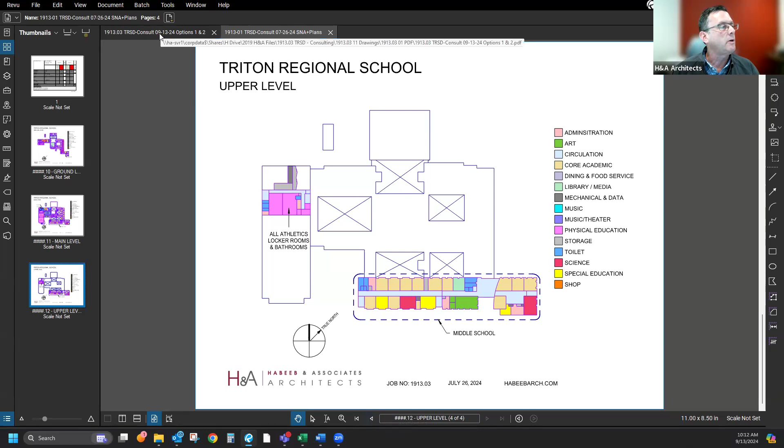You might remember the space needs assessment we talked about at our last meeting, where we identified the use of each and every space in the facility, and then did a review on how those spaces compared with the MSBA standards. The overall conclusion was that there was excess capacity in the school based on those guidelines, and we also found that some spaces were oversized—the library in particular comes to mind, which was grossly oversized by the MSBA's standard for a high school.

So thinking about those things and the comments we heard last week, we've come up with some ideas about how we could potentially rearrange things and also address entry.

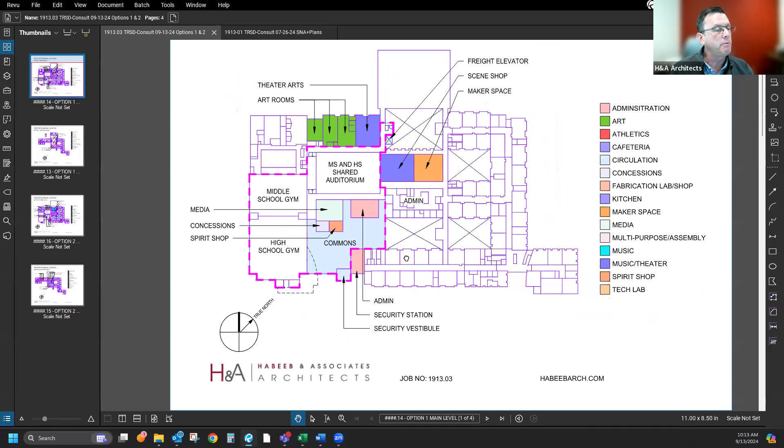So the courtyard, you might recall, is in this area here. The middle school is down here. And our main entrance to the school is tucked around the corner somewhere in this area. The building really does not present itself well to the road for pickup and drop off, and for entry in general.

So we started to think about how we could address that—how could we provide a secure entrance, and how could we rearrange things so that members of the public visiting this facility, other than the students, could get access to certain spaces for events that might occur after hours? If there's something in the auditorium, an athletic event in the gymnasium, perhaps an art show, a music performance, or a theatrical performance—how could we limit access to those elements the public needs to see while providing a secure boundary for the remainder of the school?

So there's a line here that comes around like this, suggesting what that boundary might be. In this option, the courtyard area could potentially be captured as indoor space, which would require some new construction to put a roof over that area. But it could provide a very generous area for entry, and also an area for informal events and socialization—I could imagine loose tables and chairs, and maybe even some limited food service in this area.

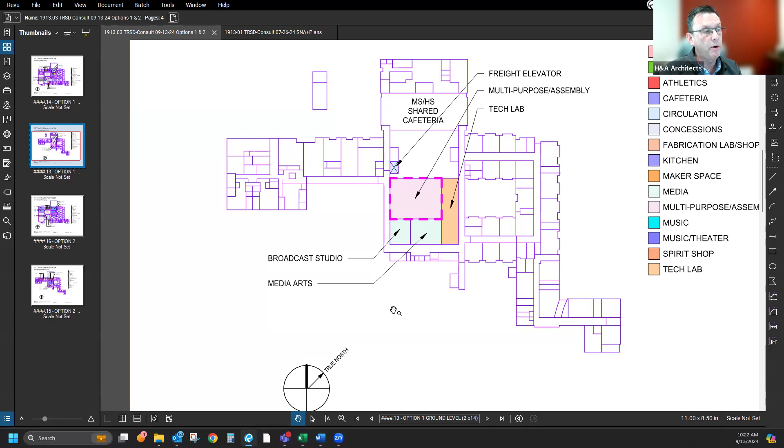And then there was some thought here about potentially a media arts program, the journalism, and a broadcast studio potentially for production of video and audio segments where recording could take place. And then here, suggestion was to consider putting a technology lab down here.

So that would— Can I ask a question? Yeah. So you have it as multi-purpose assembly. Mhm. So as far as the layout, and I'm sorry if I missed this, as far as furniture and fit and finish, is it largely an open space?

So, yeah. I'm thinking like at the high school, sometimes on the worst of days, when there's lots of teachers absent, oftentimes the library space is used for study when we don't have enough subs to cover. It's not ideal, but it's a reality we have to deal with. And could that be a space that could be used for that as well?

Is it that versatile? Is that what you envision? Yeah, I think the intent would be that it's very flexible, and could be reconfigured as needed depending on what types of events. It could be used for a study hall, or for an assembly or a small performance, maybe even a music recital, something like that.

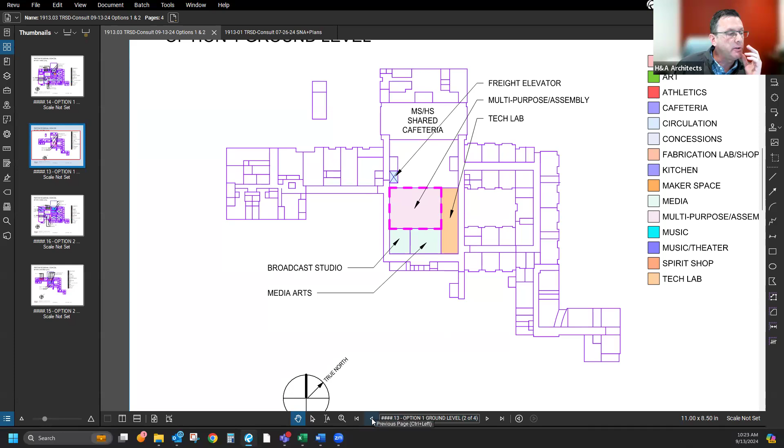One thing I do want to point out, which I neglected to mention, is the shop space is on the middle level or the main level of the school. But the loading areas are downstairs, down in this area here. So that creates a challenge for getting material to the shop, because we're talking about potentially a large set piece, building materials, whatever might be needed to supply the shop. We need a way to get that material there, and there's no immediate way to do that.

So we would suggest that a freight elevator could potentially be added right here, which is just a short distance down the corridor from the loading areas, which are in the back near the cafeteria. And that would have pretty quick access to the scene shop - it would be right across from the scene shop area.

All right, okay, so those are some big ideas. These are high level ideas. And there's another option that I can go through, maybe which I'll pause and see if there are questions on this. We can do that too. Yeah, sure.

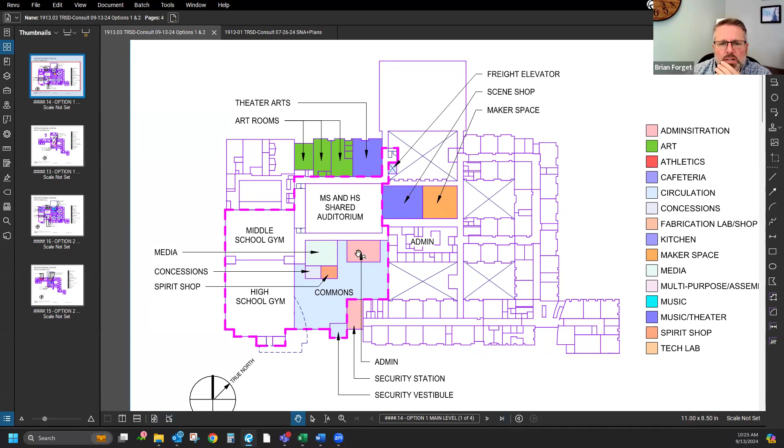So one more question I have. On the new admin in the Commons, does that replace - just to the right of that is the admin, the high school admin and the central office administration - does that replace any of that? No, it's supplemental to that, because I believe there's some additional offices in this area, guidance is there, and some offices in this area here. That's art, so straight across - I think that was admin space.

Yeah, those are all art rooms down through there. He's talking about the nurse's office. Yeah, sorry, you're right, that pink there is the nurse. So we're looking at this and this, and some of the layouts here that we're suggesting would displace these offices, so we want to make sure that we don't lose them and that we have a new home. They were pushed out into this area here.

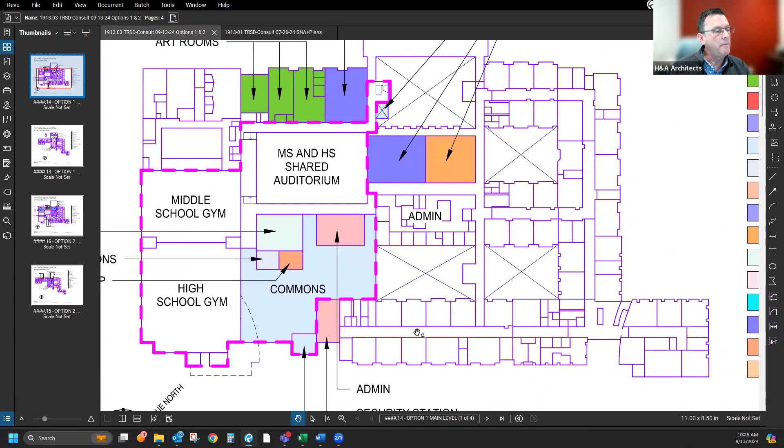And one more question, and I'm sure other people have questions too. So the Commons then, does it not become the dining commons? That's just a general gathering vestibule, if you will? Yeah, it would be on a large scale though. It would be really more of a large lobby or a gathering space. And we really thought quite a lot about bringing the dining services up into this area, and I think there's some very challenging logistics with doing that.

The idea is very compelling, of having a dining commons right at the main entry to the school. And there are a lot of schools that have adopted this model, and I happen to like it very much. I think our challenge is if we look at - I'm going to go back to the space needs assessment here for a minute.

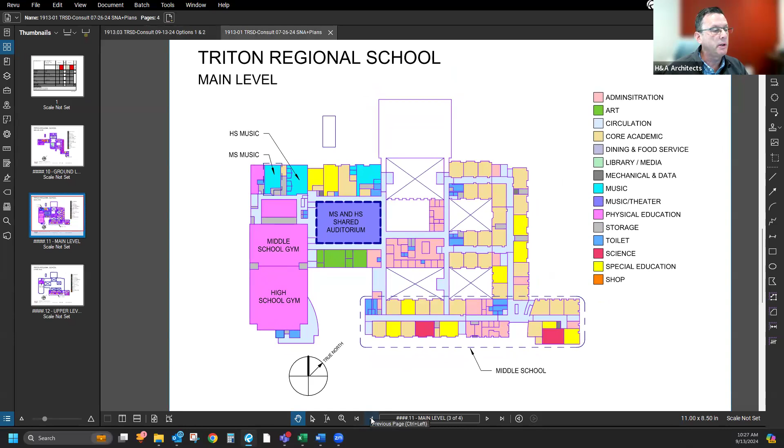So our current cafeteria is here and the kitchen is right behind it, but this is on the lower level at grade. And so all of the loading that we need, and there's a lot of loading activity for a kitchen, it's all down here. And then there's also a lot of utilities that are required to run a kitchen - there's gas, there's water, there's grease, and so there's a drain for that function out here on the site already.

All of that stuff is fairly expensive to relocate, and considering that the utilities are already located down here, I think that would be a challenging thing to do, and would probably be cost prohibitive. But we had another thought on that, which I can show you in another option. So we can go back to the first one, and maybe if there are other comments or questions on this one, we can talk about that.

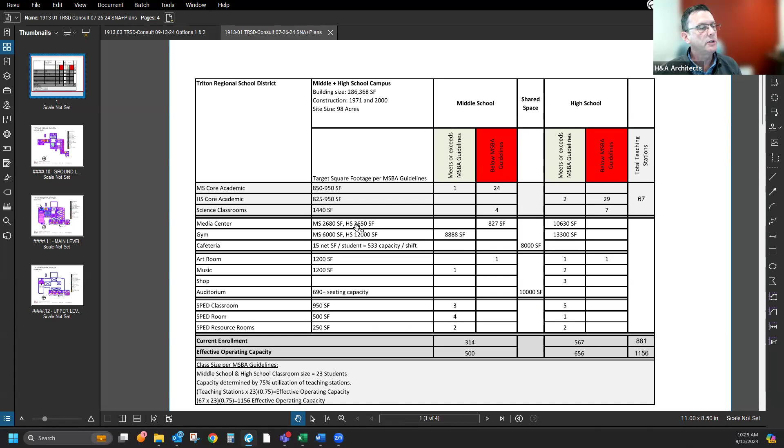My only question is, what would the new library be, square footage wise? We would target the MSBA number, which I think was 3,600 square feet. And that would be just for the high school, or would the middle school share that? That would be the high school only. We could potentially combine them. There's certainly plenty of room to do that, but the standard here for high school is 3,650 square feet and 2,680 for a middle school.

So you might remember that the middle school library here is very undersized, and the high school library is grossly oversized. So we could potentially combine these two into a single media center, which would be approximately that. I don't want to speak for Al, but I would say if we're looking at something like this, having a combined media center library would make sense to me.

And I think there's also space, right? And that could be a programming decision down the road. I think there would also potentially be space to capture a couple connected rooms where the current library is, which is a large classroom, and make a separate space if that was determined as we went through this process. I think that could work, if that became the high school and then it was determined that the middle school made a lot of sense to keep separate, I think those could both be accomplished in this plan. But I do agree, I think there's where there can be efficiencies, the only question becomes the scheduling and if that's going to be a high frequency, high use space.

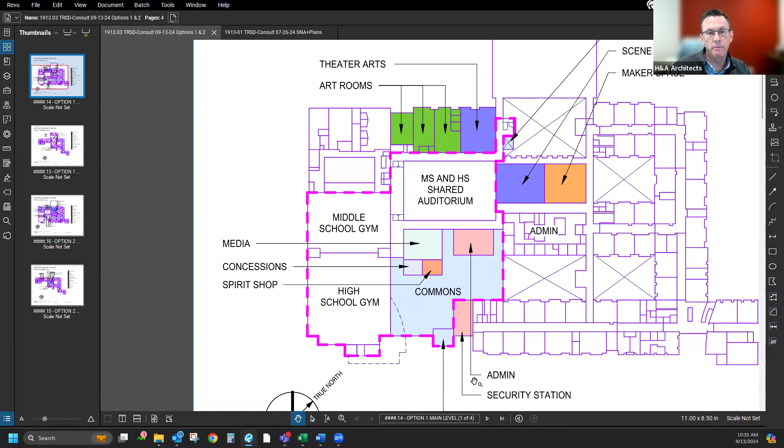I've always loved that idea of that commons being dining. The more you talk about it, I think there's the cost prohibitive piece, absolutely. And I think then the loading alone would be problematic in that our only loading spot would be the front of the building. But I actually really like it as a commons, that connectedness between the middle school and those shared spaces makes a lot of sense. It really gathers things together in a way that's not possible right now, which I think makes it an appealing idea. There's certainly costs associated with doing this because we're taking outdoor space and we're making it indoor space.

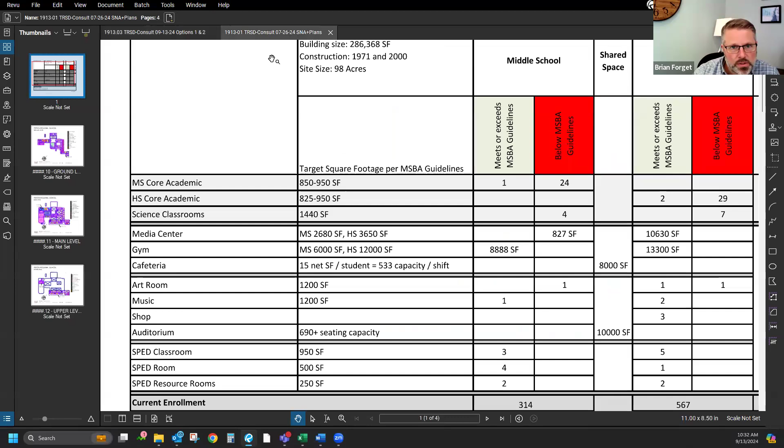I have a question. Brian, refresh my memory, what is currently housed where the proposed art rooms are? I can't remember. Those music rooms? So there's a music room on the end of the hall right there, and then our theater room is right next to it. Our TLC room, which is for students with more significant disabilities, is there, and then lastly, it's an academic support room. Okay, thank you, I just couldn't remember.

I know there had been changes over the years. So the two yellow rooms are special education. But good question, Chris. And I think those ultimately would be able to be reworked into the rest of the square footage. The fact that on paper we have something like 80 to 90,000 more square feet than the MSBA formula would say we need. We don't have a solution for each and every space today, but you're certainly right that if we move the art program over here, well, we're displacing other program here, and where does that go? We would have to find solutions for all of that.

The TLC program, so the yellow space in the middle, would be a priority, needing a space big enough for that cohort of students, and ideally a space that is accessible because of some mobility issues, and wanting to make sure that it has functionality year round because we run summer programming out of there. So all those things, when we would be identifying another space in the building, would be important. Got it.

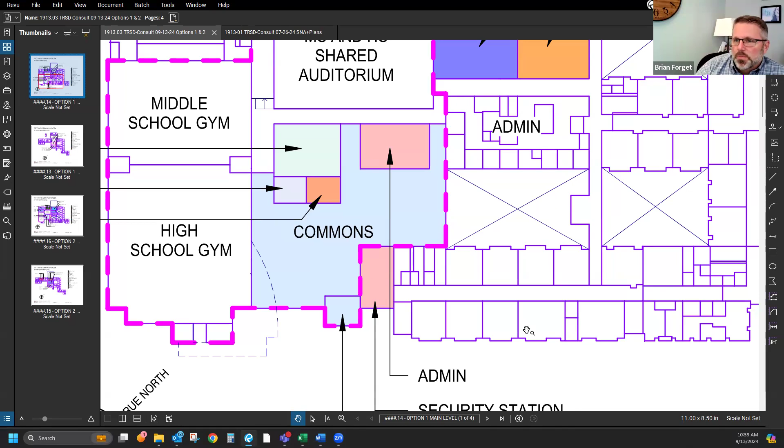Agree, there's definitely some advantages to doing that.

Going back to the conversation Patrick raised, and Narissa was going to ask about the other, the blue workshop and the orange makerspace. Could you carve out a corridor between those two spaces?

Yes, absolutely. I think that circulation issue is something that we struggle with as well. I think we would all want to maintain the corridor that's there. But if you did have a scene shop and expanded the theater program, I think you wouldn't want one.

You could locate it across a corridor, but there's a congestion point there when you're moving set pieces or equipment from the shop to the stage. I was involved with theater in college, and there's a lot of activity happening around a stage when getting ready for a production. It's something you typically try to avoid, having to use corridors to move stuff around. So a shop really wants to be directly adjacent to the stage, with an opening somewhere backstage. But the way things are laid out creates some challenges for moving people around the rest of the facility.

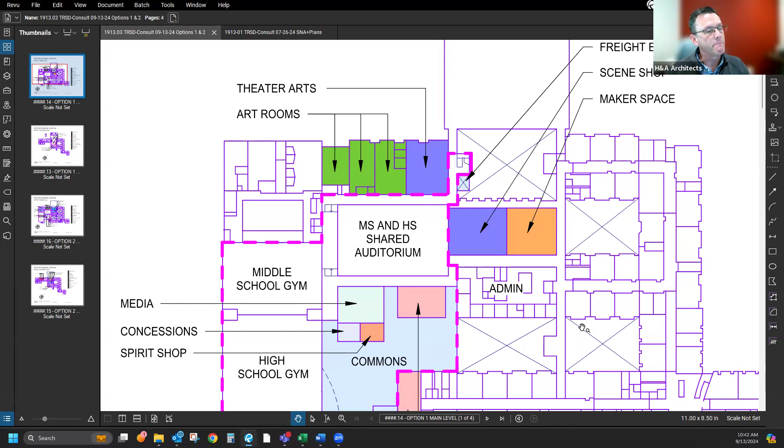All right, other questions - again, we're talking big bucket, big block concepts. So as far as this concept, is the backside of the middle school gym - the weight room, wrestling room, locker rooms - still untouched in this scheme? Yeah, that wouldn't be touched.

Great, thank you. There's a bit of a theme, which I think we'll see again in the next option, that creates a focus on the arts around the middle area of the school, which aligns with public access. I think that provides more opportunities for art display and musical performance. If it's possible to group those things around the area the public can access, it really gives you opportunities for showcasing student work and seeing what's going on.

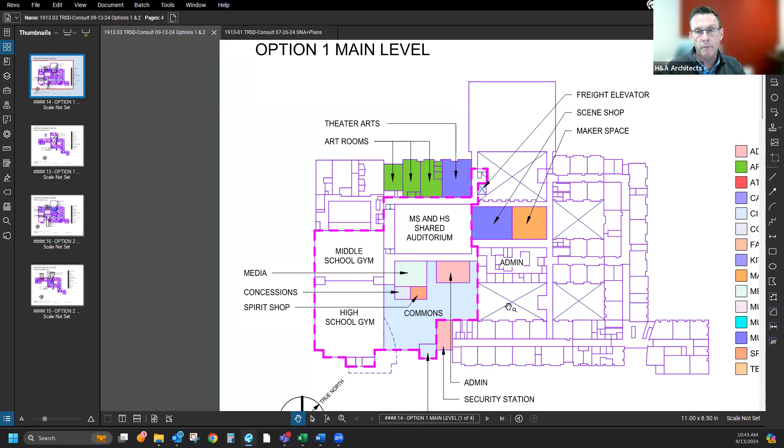Want to take a look at another option? Can I ask actually two more questions?

Yeah, sure. One is, I'm sure this is something you thought through, but it feels like a scene shop would be one of the noisiest places in the school. Is there really good technology for mitigating the effect that noise would have on the other activities happening in the area?

Yeah, there's certainly some soundproofing we could apply around the perimeter of the shop, but I think just by virtue of its location, that will help with noise control quite a bit, because it would have corridors on either side and a stage on one side. The makerspace is likely also to be a noisy space as well, so perhaps there's less concern about noise in a space like a makerspace or tech lab. I think just by virtue of its location, you'd be able to control that.

And my other question was, I know we had extensive conversation about science labs last time. I know this is big block, but was your thought just moving walls or something like that in the high school and middle school, rather than repurposing space to get additional spaces? Or does this just not address the science lab space issue?

We didn't address it directly, but I think the general thought is that the science labs really need all the utilities that go with labs, and it would be somewhat costly to relocate those things - though we could certainly do that. But let's take a look at the labs, I think we're downstairs.

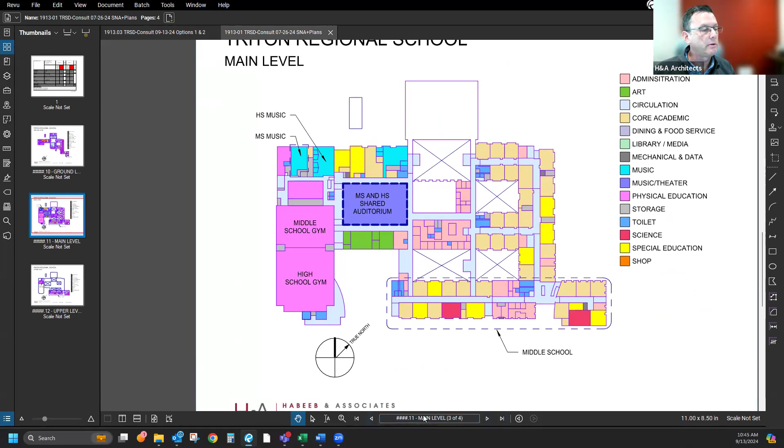Right there, yeah, the labs are down here. We haven't addressed that directly in this exercise, but the notion was to try to find some way to expand some of the teaching spaces while keeping it in this general area so we wouldn't have to reconfigure the utilities. We'd also want to be mindful of the prep rooms in between, for prep for classroom work and for chemical storage and things like that.

Okay, perfect. Thank you. Okay, I guess one last question. Shocking, Brian's talking the most.

So on the new concept, for where again the admin to the right of the commons is half high school, half district office - does the courtyard, is it cost prohibitive to capture some courtyard space? I know courtyard space is important for outside light for landlocked rooms. But for example, in that big X courtyard to the right of the commons, could half of that - if I take roughly the same size as the high school and central office, could you keep the high school where it is, put central office kind of right below it in the courtyard, and you still have half the courtyard left for outside space, and then you've got natural light coming in from the commons? Is that generally speaking feasible?

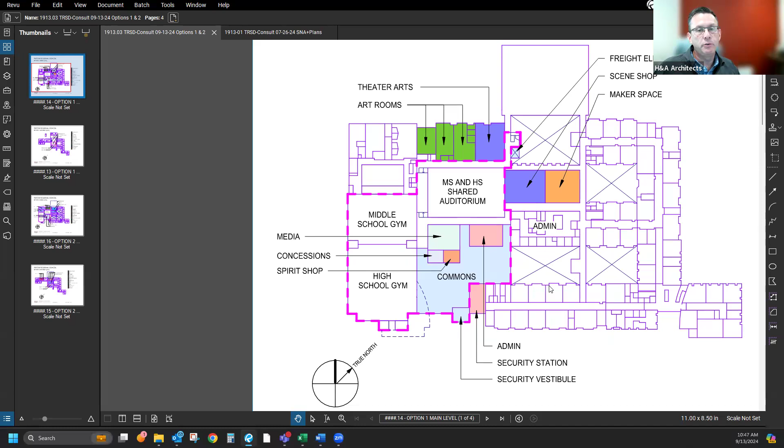You could do that, but I think we would have some challenges with providing windows and light to private offices, because we can really only use the edges of this space for that purpose.

So if we were to come in here and expanded, is this something like what you were suggesting? I was thinking the other side, but yes, that. Yeah, the other side. Okay, yeah.

So that is a little bit more interesting because we would have an outside wall here where we can have windows. And on this side, even though this is an indoor space, one of the thoughts we had about this commons is we could make the roof height virtually anything that we want to. And if we raise the roof a little bit higher, we could create what we call a clerestory, which is a band of glazing that goes around the top part of the wall.

It's something you'll see in a lot of gymnasiums - just a band of glazing, and it doesn't even have to be transparent, a lot of times it's translucent. What that allows you to do is borrow daylight from an interior space, so that if there was a row of offices right here, Brian, we could potentially design this commons area to bring some natural light in from the top, and then borrow that light - we call it borrowed light - for some offices that might be along this edge. I'm pointing at my own screen here, I know you can't see that, so I'll try to use the cursor to follow you.

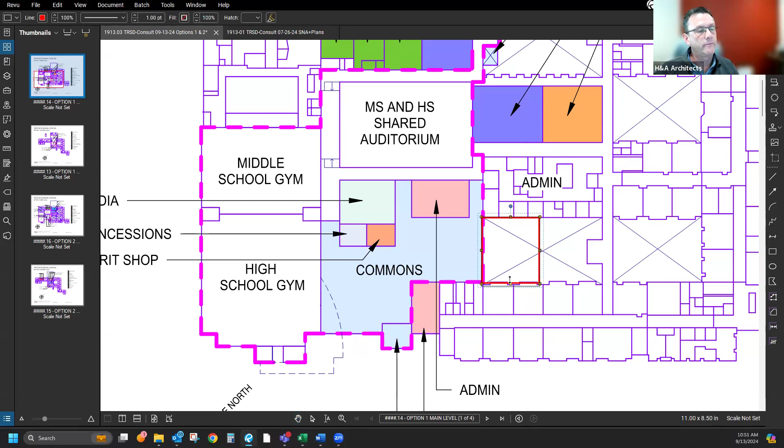Okay, just one point on that - Brian, good, where you look to move the offices that's in red now, that would also limit windows on two of the middle school classrooms that we have currently. I'm just looking out my window at them. Yeah, that's a good point, and that takes away their windows, and I wouldn't want to have classrooms that are windowless. Yeah, it's true, a good point. I would agree. Could you put those classrooms where the middle school admin offices are now, though?

If you captured that space up there, but then put those 2 classrooms... the entrance is now bottom right of the corner of your screen, Kevin. Right there, entrance. Just to the left, that's another administrative suite. So could that space be repurposed as the 2 classrooms?

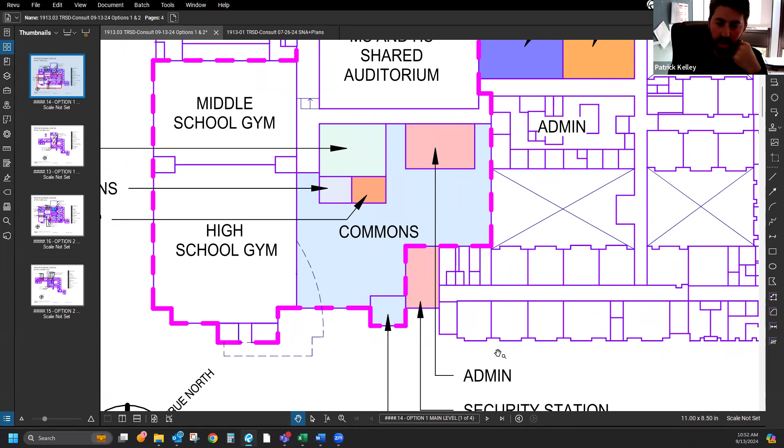Brian, I'm thinking the area at the end of the middle school hallway, all the way over to the left, next to where we're adding offices, where the entrance area is. We've got 2 bathrooms there, a stairwell, and classrooms. You could convert that into an admin area, and switch out the middle school office to be classroom spaces. Patrick, I think that was our intent for having an additional administrative office area here, that you could potentially locate the middle school from here to here. Then you're in a more central location, and it allows a visitor, if we go with one single entrance for the entire facility, to go right to the middle school office. It's right there.

I have a quick question, Brian. When we enter the commons, if we do all the extra glazing, is it possible to put vegetation in there to help with calming as you come into the building, to subconsciously calm people down, with maybe a little water feature with some vegetation?

So some indoor features, yeah. You could, absolutely, with all that extra glass it would grow, and it would actually be a good thing for a calming mechanism coming into school. I like that, nice idea.

You get the credit for the idea. Well, I am a landscape designer, Brian. That's right, so I like your thinking. I might just go sit out by the trees when I need a moment. I think everyone in the school would like that.

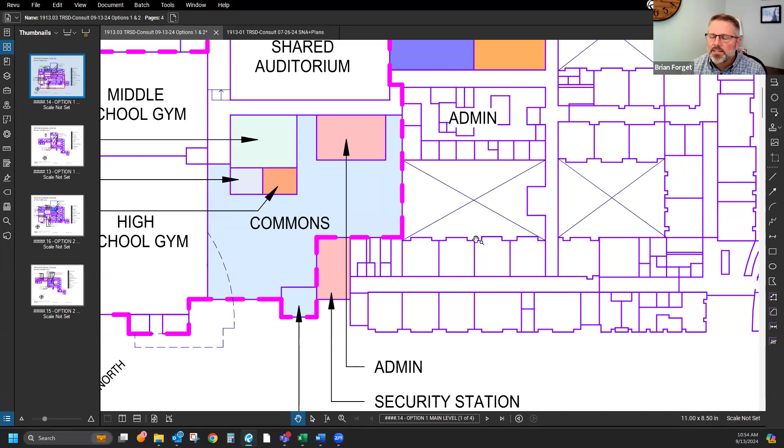As far as big block ideas, everything we're talking about, Kevin, conceptually is doable, right? There's nothing here we've talked about that sounds like it's not. I don't think there's any obvious reasons why any of these things couldn't work. It's just a question of doing the next level of investigation, and all of the work that follows.

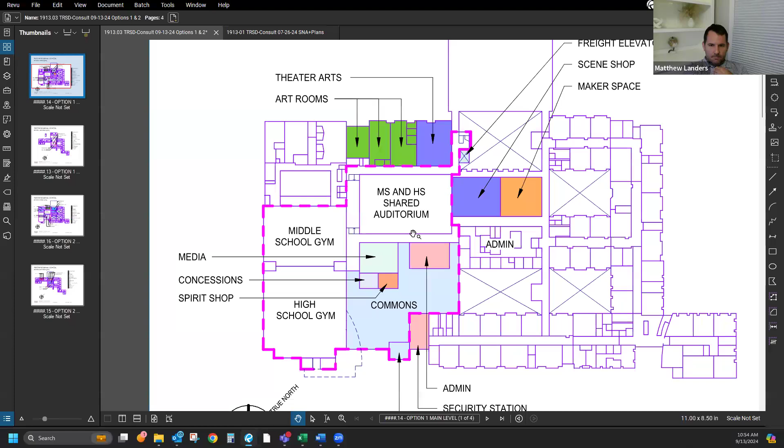Did you have another option for us? We did. Oh, did somebody have a question? No, I think that's... oh, intercom, okay, on the radio, or someone's.

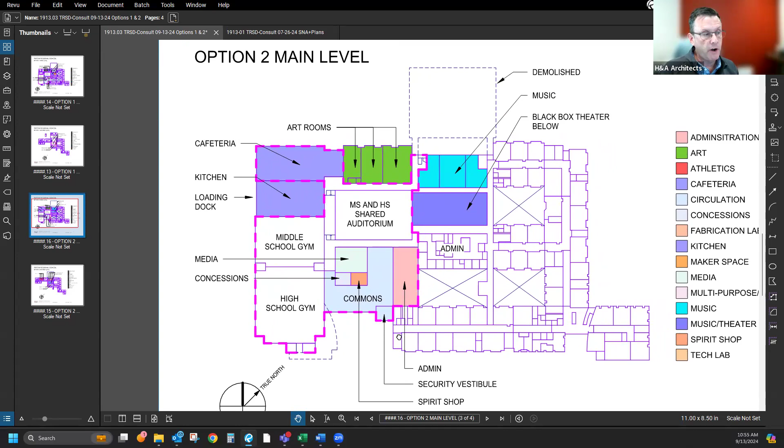So this idea is a bit more, I'll call it aggressive, because there's a pretty significant departure here, if you haven't noticed it already. This idea was to remove the existing caf and kitchen and try to make the layout of the school more compact and improve the flow throughout the school, and make the cafeteria perhaps less remote. The entry is much like the previous version, but in this version the area of the commons is reduced, which I still think is a very generous area. It's still a large area, but not quite as expansive.

That's because in this option, the exterior wall is pulled back. This is the corner of the middle school building right here, so it would be roughly where that is. It still leaves a small courtyard here right in front, which is still desirable, I think, as a waiting area and as a gathering area, to have some horizontal surface outside that's bigger than a sidewalk.

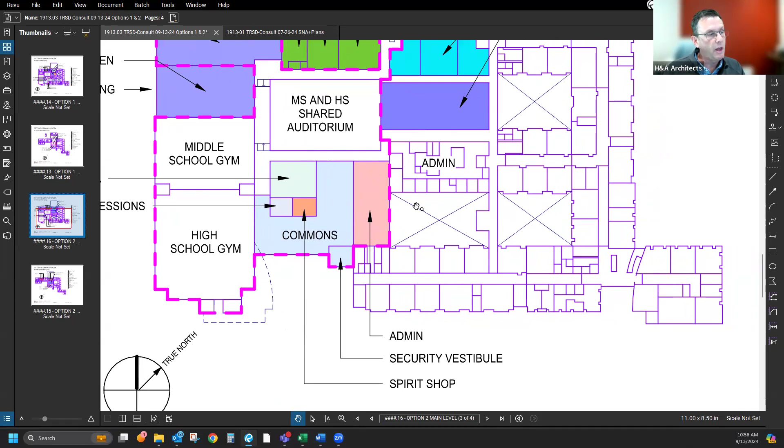So this idea, I think, also has some appeal. It would still include a security vestibule, and some relocated administrative offices, including potentially middle school offices, moving over to this general area here. But all this would take place under a new roof, creating some indoor space, much like the version we saw before. The media center idea hadn't changed too much here.

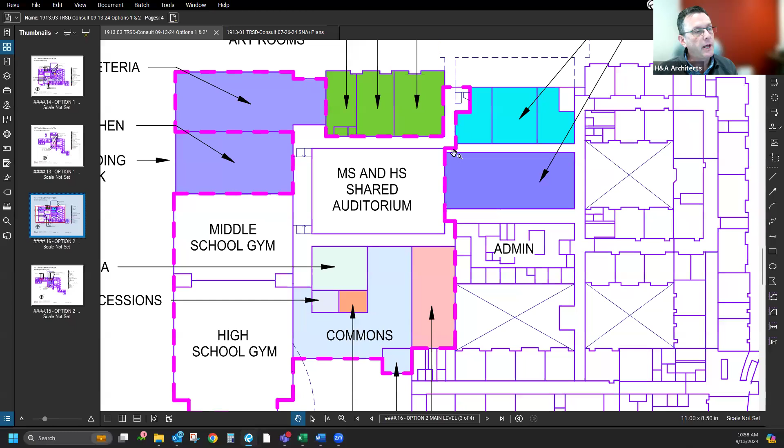But I think some of the big ideas here that are different would be, instead of having an expanded theater program that involved building a shop and repurposing space for theater arts at this level, the volume we have to work with, if we're able to relocate the library, could potentially be used as a black box theater, which can function independently of the auditorium. We would want that corridor to be back in this area, so it's not represented quite right, but we can leave that corridor intact, keep the existing flow, capture that volume of the library, and have the theater there as a black box theater.

Is everybody familiar with the concept of a black box theater?

It's not a traditional arrangement where there's rows of fixed seating, a stage, and a proscenium, like what we have in the auditorium. A black box theater is self-descriptive: four walls, a floor, and a ceiling, configured in virtually any way imaginable. It's highly flexible, typically smaller than a full-scale theater or auditorium, and more intimate. It doesn't require a lot of set pieces or lighting.

It's flexible, and you can do virtually anything in there, from a simple recital or poetry reading to a small musical performance. With some loose seating, it can also be used for a play or theatrical production. Typically it might not have a shop, so it avoids the resources needed to build and maintain one. It's a smaller, more modest approach to expanding the theater program.

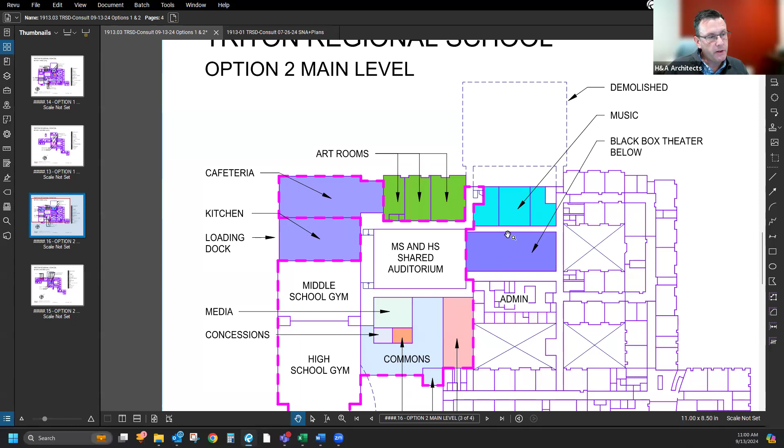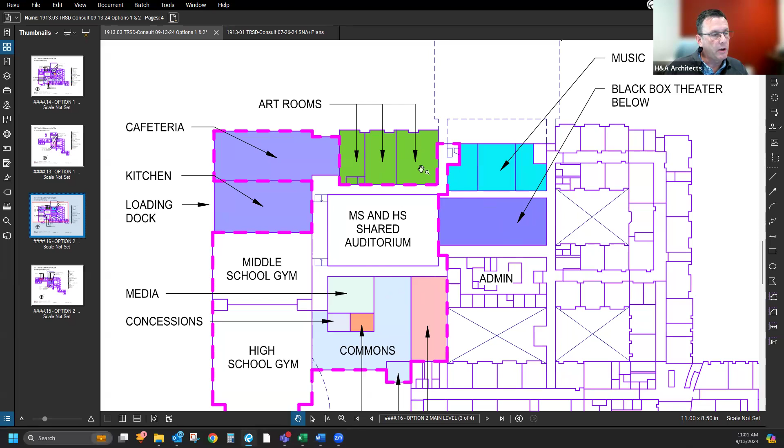Currently we have a courtyard here, with the cafeteria over here and the kitchen back here. This is an existing courtyard. We could fill in part of it with a two-story space and create some new space, while still keeping our corridor to access those spaces. I think it's a nice flow where you get this circular pattern, and then we'd put this corridor back in here.

If the music spaces were also used for recitals, we could expand this area of public access potentially down here as well.

The other big idea here is relocating the cafeteria and kitchen. The opportunity is that on this end of the building there's an existing entrance that may not be used anymore, but with a little work it could be turned into a loading dock, giving us an alternative loading space on the side of the building instead of in the back.

This end of the building, in the original 1971 design before the 2000 renovations, had basketball courts here, so this whole area was reconfigured. This area in the back is double height, a large volume you might not notice because some mezzanines have been built inside. With renovation, you could recapture that big volume and use it as a cafeteria, with glazing on two sides for great light.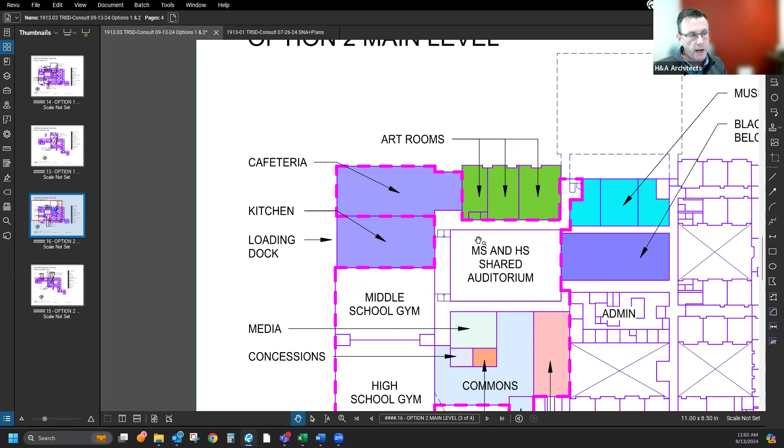It could be a great space. The kitchen would be immediately adjacent, with the serving line here, pulling things a bit closer to the middle. This area always felt very remote to me, not centrally located.

But this is a pretty significant departure, with a lot of program here. I think we'd displace some space needs, like a lot of locker rooms. So there would be a big impact here on athletics.

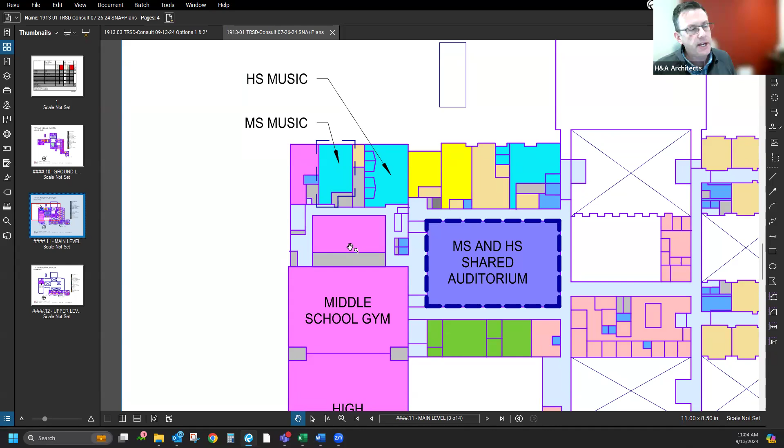We have some lockers in what I believe is the wrestling area—the wrestling room is on a different floor, but locker rooms would be the big thing. It's also where our maintenance department shop is, so we'd have to figure out where that goes. That's downstairs, which was my other question: which floor is the cafeteria on? Because that backside of the building is sloped.

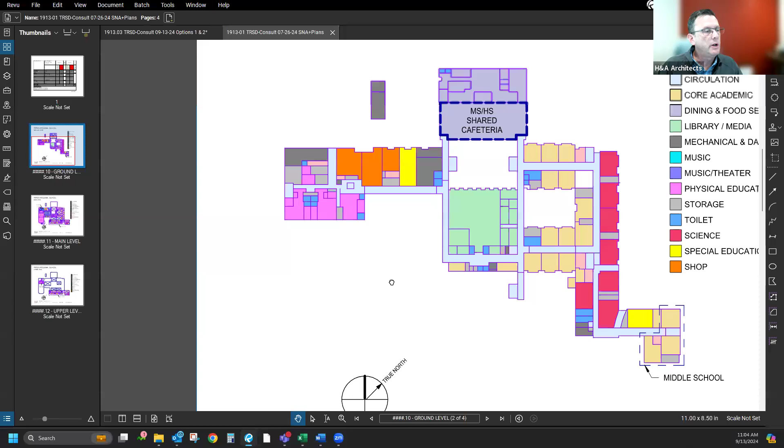It's on the main level, so you'd still keep what was underneath, correct? Okay, so downstairs on the lower level, I believe the shops are down in this area here, right?

Is it problematic for the loading dock that you're on a slope there? Because you're going from what would be essentially a main floor to a basement floor, and wanting to make sure there's enough space. I'm assuming we would just reconfigure the driveway and have a different traffic flow.

I believe, and I haven't looked at this recently, but I believe there's a retaining wall in this area where the grade changes. The grade in the back of the building is a full story lower than the grade in this area. So I believe there's a retaining wall in this corner where you transition from the higher level grade to the lower level. Yes, there definitely is, yeah.

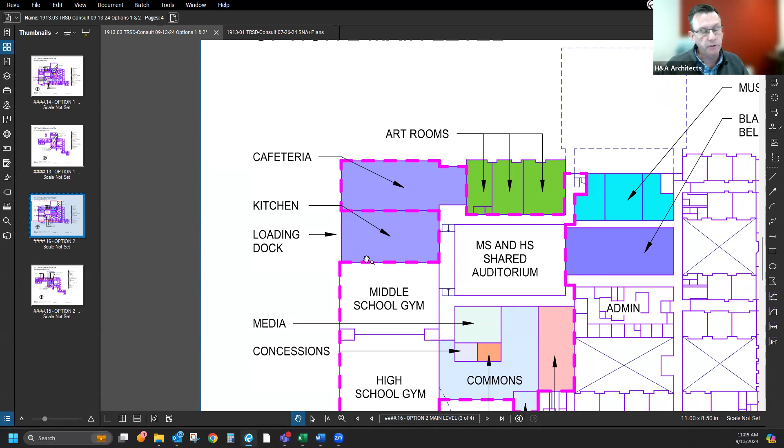And there was an entrance here. I think the door opening is still there. It may not be used, but it's still there and it could potentially be opened back up.

And then I think that there's some space between the exterior wall and the road where we could potentially sneak a loading dock in, here where a vehicle could pull off out of the drive lane. I think we would want to study that a little bit more to see if that's really feasible.

But the general thinking is that there's potentially some big spaces here that we could create by returning to the original way that the building was configured. It's a potential opportunity, but it does have its challenges.

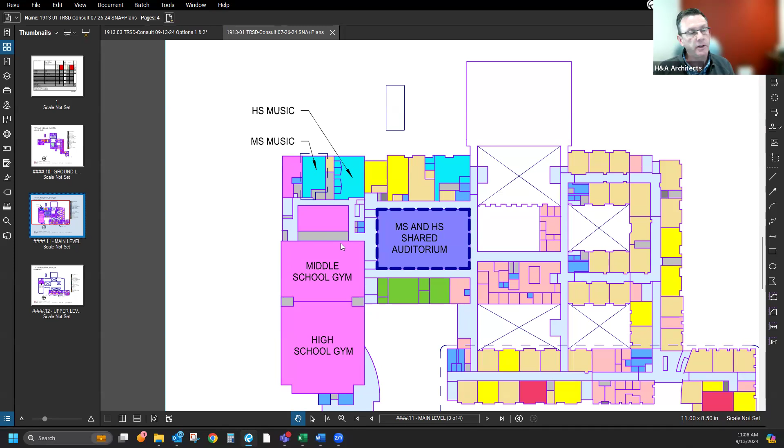We need to find new homes for everything else, right? So there's some athletics here that gets displaced. Music, I think we could take care of that by potentially adding some space here. But...

We could—now this is a continuation of option 2. We go downstairs to the lower level. And here, this is the proposed addition, which would fill in a portion of that courtyard behind the dining area.

We could potentially take some of the shops that are in this area and move them here. And you can load your shops here. Now this becomes an exterior wall. If the cafeteria is gone and the kitchen's gone, this is an exterior wall.

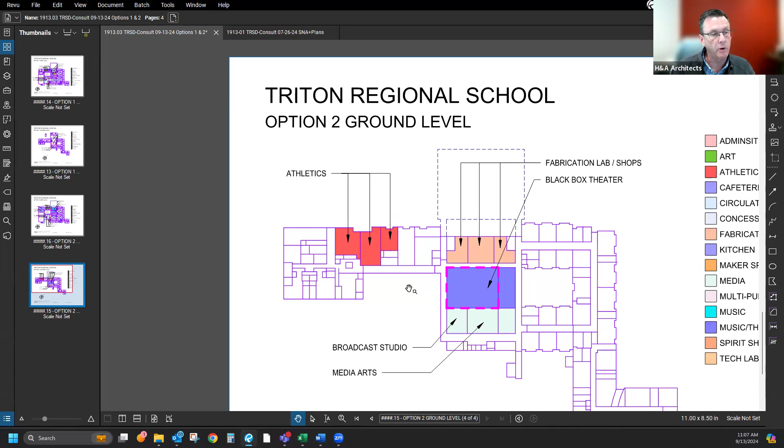We can load all the shops if we need to have some roll-up doors in the shop areas to bring some materials in, we can do that. And then we can potentially take those athletic functions we've displaced and move them down to where the shops are currently located. And in the middle area, this entire area is the media center.

The main reading room is this space right here, which is the double height space. And this is where we had proposed to locate that black box theater.

So the seating level or the audience level would be down at the lower level. So we would have to think about if we were to bring the public into the theater to see a performance, we'd have to think about how we want to do that, to limit access to the rest of the facility.

And then down here, there was some thought about a media arts program, which could be video production, a broadcast studio, web design—a curriculum focused around the media.

And the studio, I think if we were to do something like that, we would have to think about—a studio has to be very, very quiet. We would want to think very carefully about where to locate that so there aren't disturbances around the studio, so you can do recording and broadcasting without having to worry about noises coming from adjacent spaces.

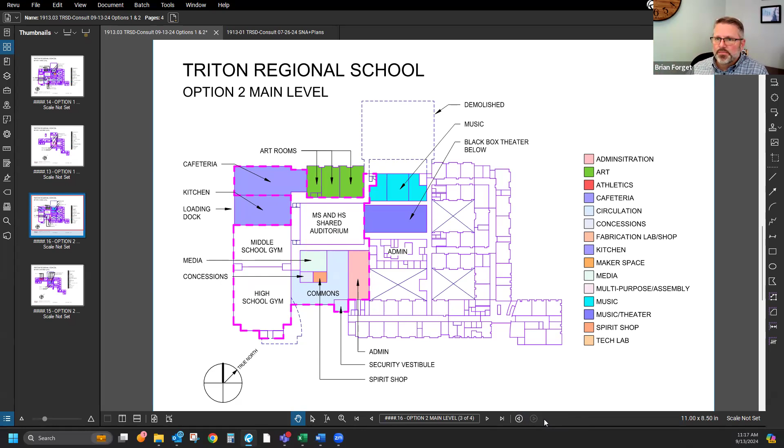The reason why is, earlier we were talking about the grading, and the grade on this side of the building is one lower. It's a full story lower than it is here, so you would not be able to load the kitchen. And then your cafeteria would have glazing on only one side. I think that would not be a very attractive space to be in.

There's a lot more wall space here available for glazing. We'd have to open it up. I don't believe there are any windows in it right now, because originally it was a gymnasium.

The only thing I could think of is if they back down parallel, they do a turnaround where the upper parking lot is, we could do a rotary or some kind of way for turnaround there, and then back down parallel with the building and have the loading dock jut out right there, so they could back up to the loading dock, and it would just have to go in that way. Because you would have the space.

I was gonna say, if you did that, you could move the parking to where the cafeteria used to be, maybe, if we had to. You certainly could, yeah.

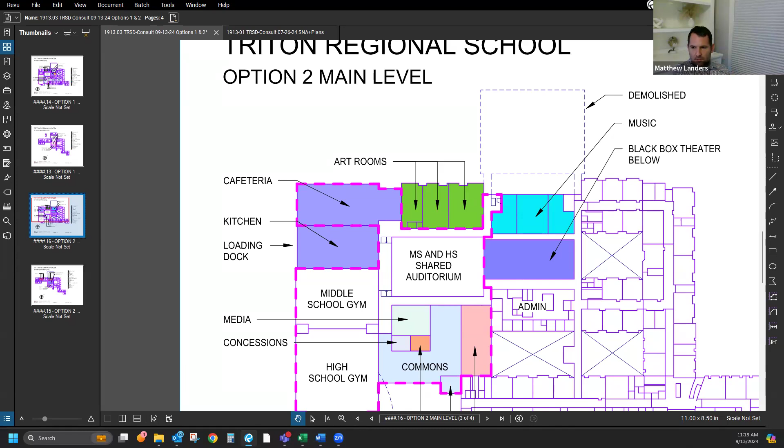And height-wise, you couldn't put the cafeteria on the bottom floor of the library and then put the stuff above it, right? The stuff on the first option? So if you put the cafeteria where the multi-purpose room is and then add an addition for the kitchen.

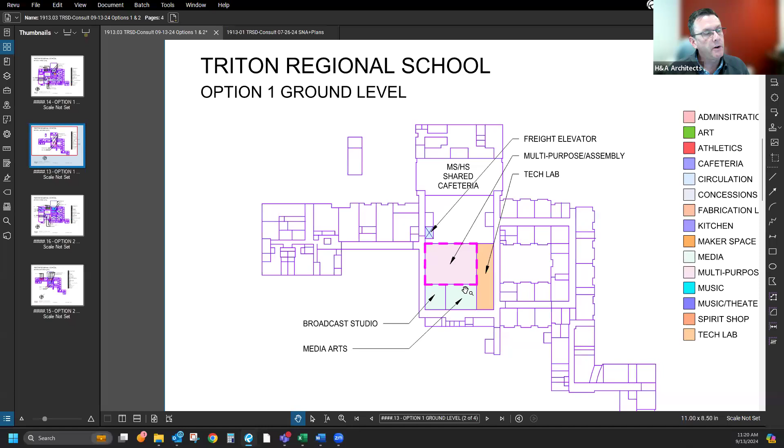I don't know if you'd have any natural light at this level. I suppose you could put a clerestory up above here, but it wouldn't be a lot of light. I think it might feel a little more cave-like without a lot of daylight. There's some nice daylight that comes in through this because there's a fair amount of glass in the existing dining room.

You also want high ceilings for smell. Truth. So it's a lot of bodies and a lot of smell coming out of the kitchen.

So what if you, Christine, I'm sure you incorporated- remember the smells of the cafeteria. Patrick, that was probably the most PC way you could ever have said that.

So again, these don't have to be mutually exclusive concepts, right? You're playing with the idea of moving the cafeteria in option 2. I would say, personally, I feel like the black box theater is a nice to have.

I like the idea of having the workspace attached to the back of the theater. I've heard that from our theater department, from any performing group, having ability to run choral risers and move the band in. So all of that, as well as there's been outside groups who have come in and said, if we had better loading and air conditioning, we would love to rent the space from you.

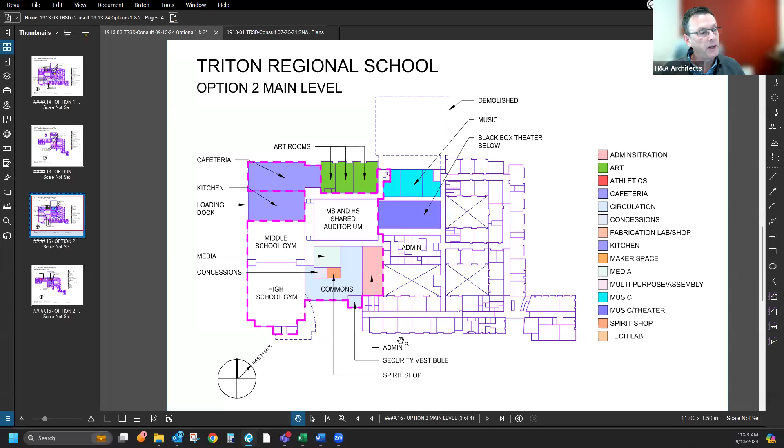This option is more modest, but still a very generous amount of space, and I think could function as equally well. It's just not pushed right out here to the edge, and it does leave some outdoor space for a courtyard. But there's some cost here. Repurposing rooms that already exist for other things is less costly because this space exists. It's already built.

Turning a room into an art room, we would have to add sinks and whatever other equipment was required to do that. But then the other big expensive move would be doing this, moving the cafeteria and the kitchen.

Personal preference, I would rather spend the money, and others please disagree, making that commons more of a central hub and capturing the space so it can be a central location, a central entry location, I should say, is a higher priority than relocating the cafeteria, because I'm guessing the money is spent on the commons and reworking that entire entry. And then the other big piece, of relocating an entire kitchen.

I would say the money is better spent figuring out access and streamlining access. I think there are a lot of operational and circulation advantages to having this commons, and we've discussed all of it.

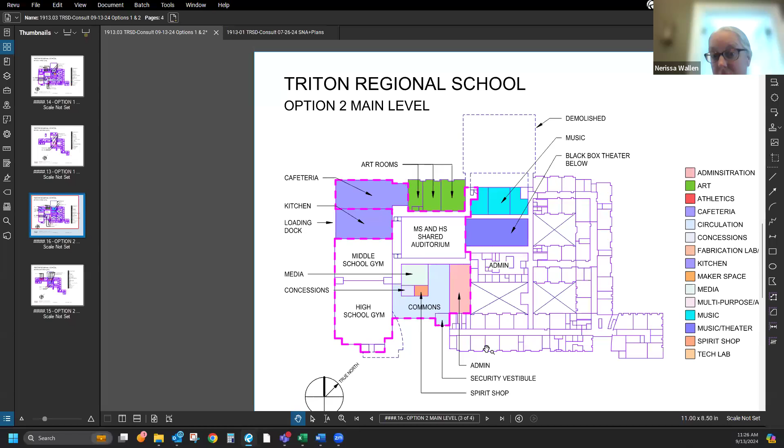I guess I would agree too. Two thoughts though. I think we've lost in this model here, we've lost the corridor again to get access to the middle school. So having a bigger commons, if that includes a corridor to get us back that access, that's definitely preferable. The one advantage I do see of moving the cafeteria up into that wing is security purposes.

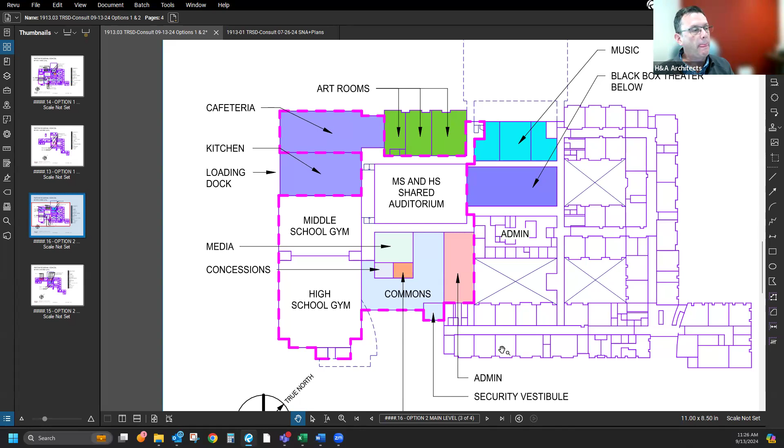So is it a safe assumption, Kevin, to say, as a general rule, when we're building a building, renovating a building, the access control like we have at Pine Grove, where through mag locks and fire doors and entry at the end of corridors, we would have much more of an ability to section off corridors, academic areas, just by the nature of adding doors and hardware and technology.

Well, it's the configuration or the arrangement of spaces and the doors and the access control together. That's how it's managed. This purple line here is a potential boundary where those access control points can happen. So in this example, the commons is within that boundary. This probably wouldn't go behind the admin offices. It would really do this. So that's not quite right.

But it would need to include things like back here, you might wonder, well, why would we provide access there? And the reason why is because the auditorium has a high occupant count, and we need to provide multiple means of egress out of the auditorium, even if a spectator never ever uses the back door. It has to be there and it has to be available. So that was the reason why we extended it here. But that boundary would include the gymnasiums, the auditorium, the commons.

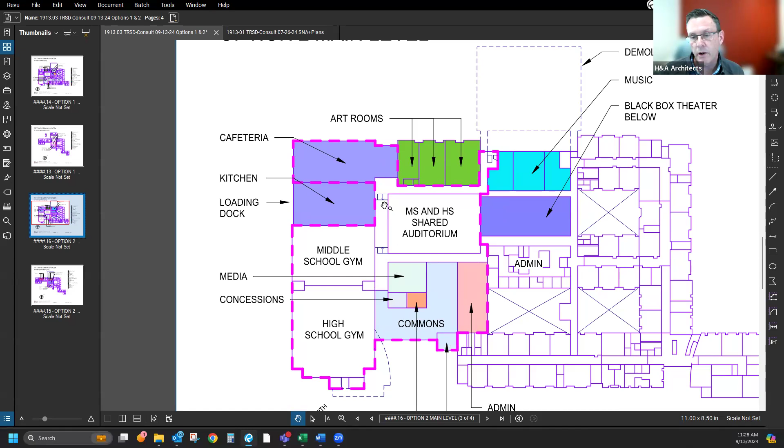It would give you access to administrative areas where it's needed, for a parent or anybody that needs to visit the offices. In this scheme, it could potentially include the cafeteria as well, if that were to be used for an after hours event that required food service. But you could also just close it off right here and not have access to the cafeteria. I think with the door hardware and the access control devices, it's a fairly manageable thing to do.

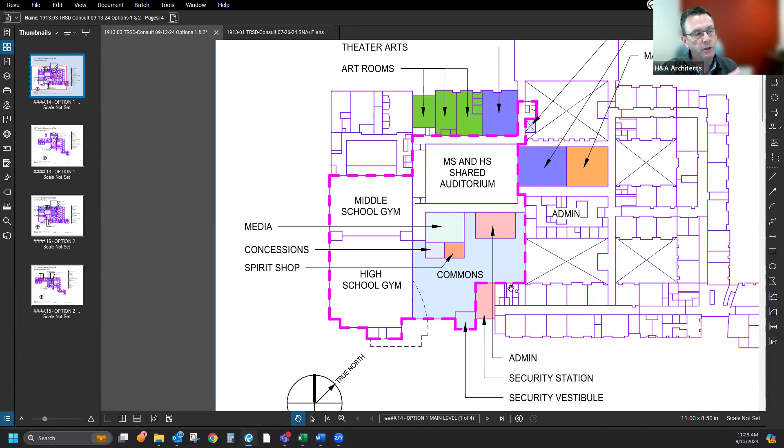And that concept applies to both of these. In this version, it's a bit more compact. But the general idea is to figure out what parts of the program we really want to access off hours, or for members of the public who are there during school hours, and then group those functions around that perimeter, with everything else off limits.

Kevin, is there any benefit in this model, where we're moving the cafeteria up, to being able to have more consistent roof lines? I'm thinking of our roof - I feel like we've got about 6 or 7 different levels on the roof, and at each of those break points are areas typically where we see water coming in and water infiltration. So is moving the cafeteria up, does it give us benefit aside from having less square footage of roof? Does it give us any other benefit in terms of the roofing in this building?

Other than having less roof area to manage and have potential leaks, I would say no. I am very familiar with this roof, and it does have many different levels and edges and lots of opportunities for leaks. Changing that is a structural intervention, which means removing roof structure and rebuilding roof structure - very costly. That would add a lot of cost to our project. We would want to think about that very carefully if that's the benefit we really want.

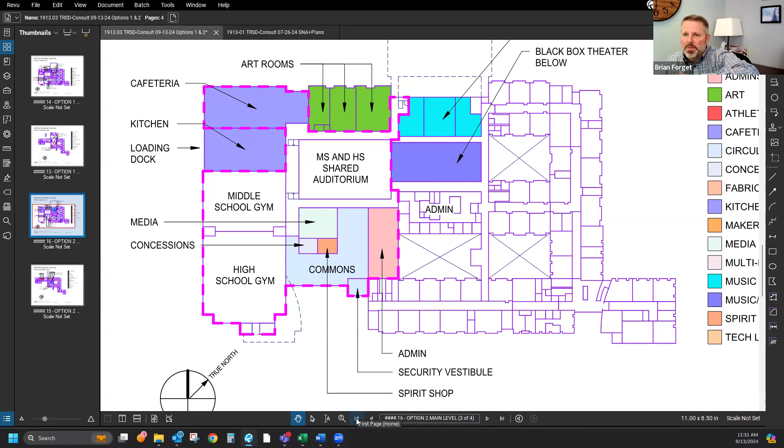Kevin, is it helpful for us to say, okay, what we like out of each of the designs, to give you a sense? Like, I can say I like the first design overall better, including the way you've got the workshop, the theater, whatever that is, plus the maker space, plus the downstairs - you've got 2 levels of use of that space. I like that one better.

What I like out of number 2 is the cafeteria in the back, which I think is pragmatic overall. And I like the fact that we're just knocking out the - what do you call it - locker rooms entirely and starting from scratch, because I think those locker rooms need to be incinerated to get rid of all of the years of history, shall we say.

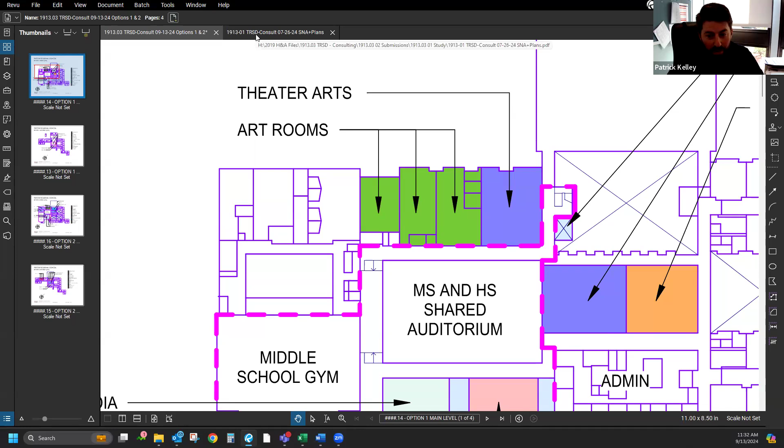Another politically correct way of saying the stank. So Brian, the ones that are getting knocked out though aren't the worst ones. The ones getting knocked out are on the 2nd floor and on the 3rd floor, not the ones on the 1st floor that are in the worst shape. Gotcha. Yeah, I think we're talking about - but we should also be knocking those ones on the 1st floor. Let's get rid of those 2.

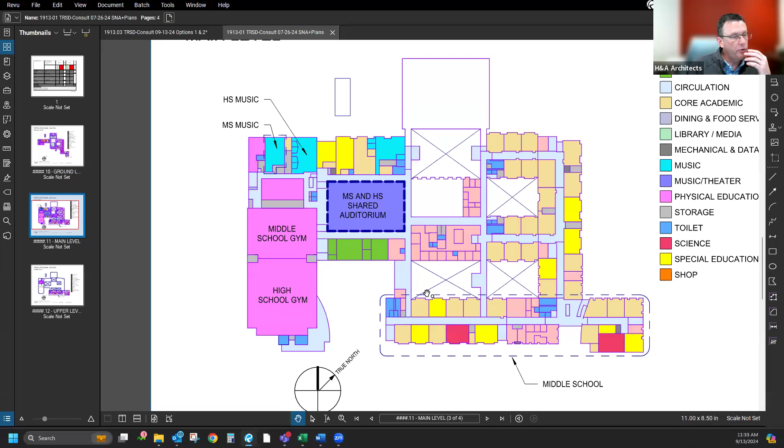Right, so on the 1st floor, I think we're talking about this area here. Yes, and then on the main level upstairs, it's these spaces in here. So our relocated cafeteria idea is this area right here. We would have a new home for the music spaces and these athletic spaces that are getting displaced, and we did accommodate that in that option.

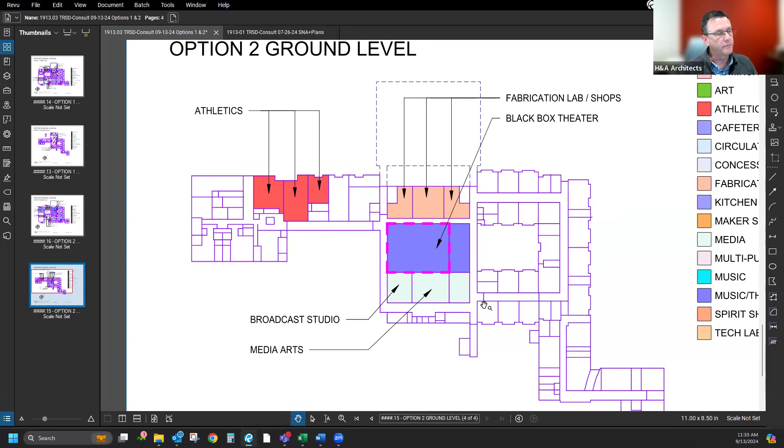So yeah, here, and then if we go downstairs, we had made a shift here to repurpose the shops for athletics. And then we had a small addition here in the courtyard for new shops and labs that had direct access to the outside - that was the thinking there. And then music was upstairs, keeping it within that ring, that arts ring that we've been talking about.

Patrick, I think it was you who made a comment about having those rooms visible to the rest of the students, that it provides a benefit to everybody to see the creative work, the good work that's happening in your school.

Absolutely, that's an idea I really like, and you can even put some extra glazing in the corridor to see, as you're passing by, what's going on - especially in a place like a maker's lab or a technology lab where kind of cool stuff is happening, with robotics or video productions and anything.

Absolutely. So Brian, you've expressed some preferences, but what about others? If we were to make another pass at this, what would it be? And is there something else we haven't looked at that we should?

Looking at the map right now, the cafeteria, loading dock, kitchen area - was that previously a gym? Yeah, I think in the original construction it was a gym, and we have the drawings that show that. There were basketball courts in there.

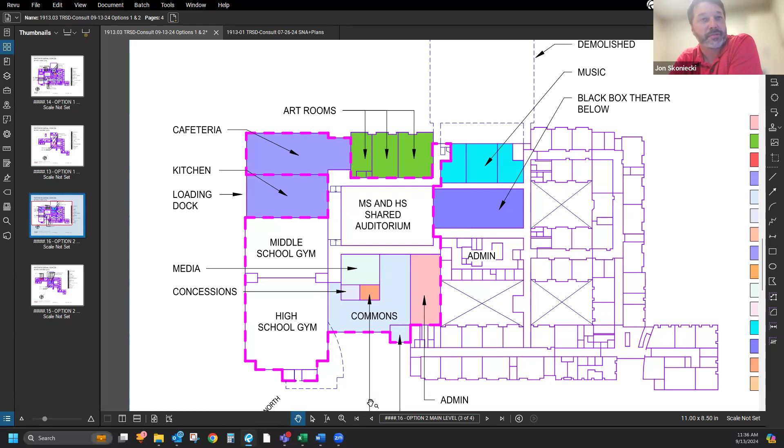Yes, yep, it's a bit of a walk. I do like that idea, and I think the space may be prohibitive, but if we were redesigning it from scratch, I agree the cafeteria right at the front, and then the two gyms stacked back to back going backwards would make a whole lot of sense.

Would. Other people? I'm partial to option one, but I do like the cafeteria in the back corner there. I don't know how necessary the black box theater is, and I do like the idea of getting rid of the outbuilding cafeteria.

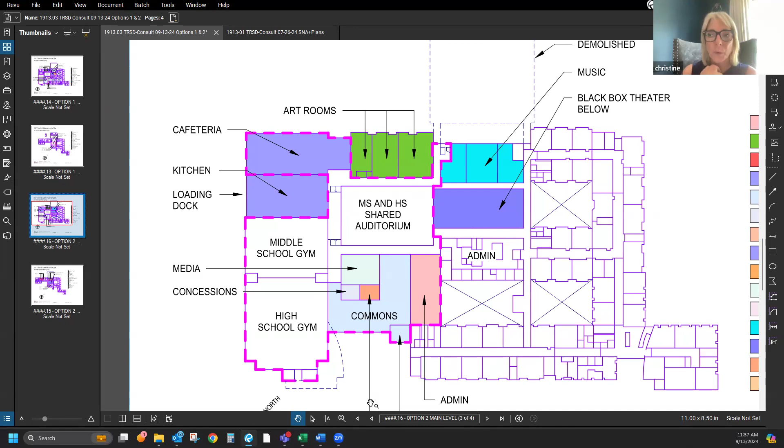So a bit of option one and two. Yeah, but it's again going to come down to cost. That's what I was going to say as well. I like option one, I like portions of option two, but again, I think a lot of it is going to come down to money.

So the idea, when we're talking, we're going to eventually arrive at costs. These are big block, big picture - this is never going to be designed to the point where we have an actual schematic budget. But I think what's helpful is to design what we feel would be an acceptable alternative, then have Kevin go through the exercise of high-level costing it out. If it's prohibitive, then the only real solution is with the MSBA, or if it's in the ballpark, we could reverse engineer and say what wouldn't we be able to do, because this could all be cost prohibitive without the MSBA partnership.

The other challenge we'll have with this option, if you move the cafeteria back there, is looking at the maps, I'm not sure how much land you can reclaim on the left side to realistically make it feasible to put the loading dock in there, where it's used quite often for deliveries. Yeah, I think that's a challenge.

Yeah, we would maybe have to think about taking some of that parking area for a bypass or something. But you're right, we would have to do some redesign in that area to make that loading dock practical. And again, could be cost prohibitive out the gate and structurally prohibitive, but to the left of the high school gym, we own the land all the way up through the parking lot.

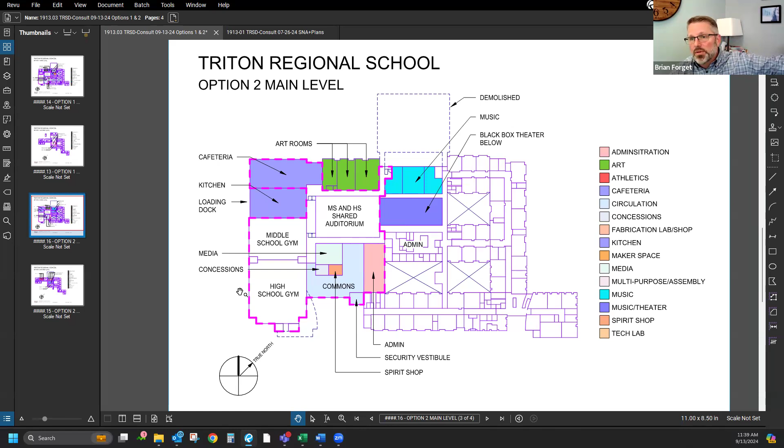So if the cafeteria was on the front, we would have the ability to put a traditional loading dock right behind and reroute traffic around that whole thing, and wouldn't have to deal with that lot line. That makes sense? Yeah, because I think the property turns here. Right there, yep. It's right about there. Yeah. Yep.

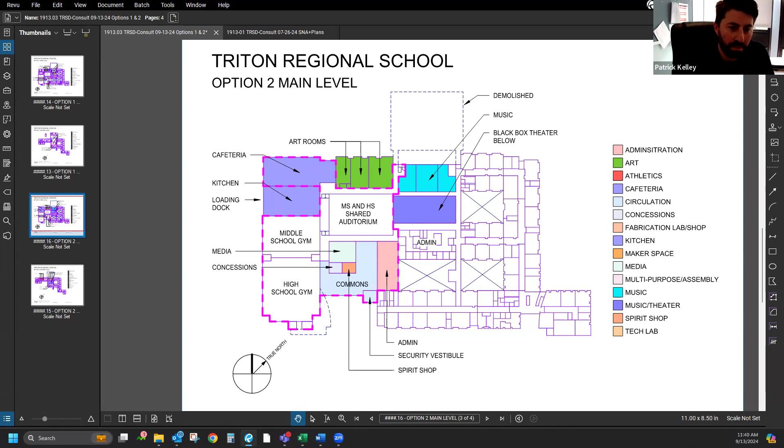Kevin, one of the things you said stuck out to me, and I like option one better, but I do like the cafeteria move in option two. In option two, the common area is slightly contracted, but I think there's benefit to having the common area that abuts the middle school go down to almost the front, so there's an entryway there going directly into the middle school out of the commons. There could still be a benefit to having space in front where you're not right up against the sidewalk, but bringing that corner of the common area down so there's an entryway.

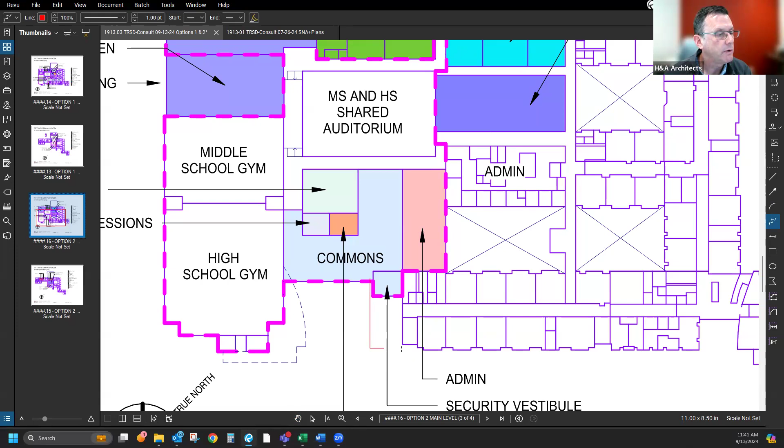Maybe it's something as simple as doing something like that. Exactly - your secure access point is here, and then you have your direct access into the middle school here, and the commons is back here. This area here is still open space, still your outdoor gathering space, which I like, that's quite nice. I think that also gives you access to bathrooms right off the commons too, which is important for visitors.

I got a quick question - will we be losing the wrestling room? I have some concern with this design regarding our athletics department.

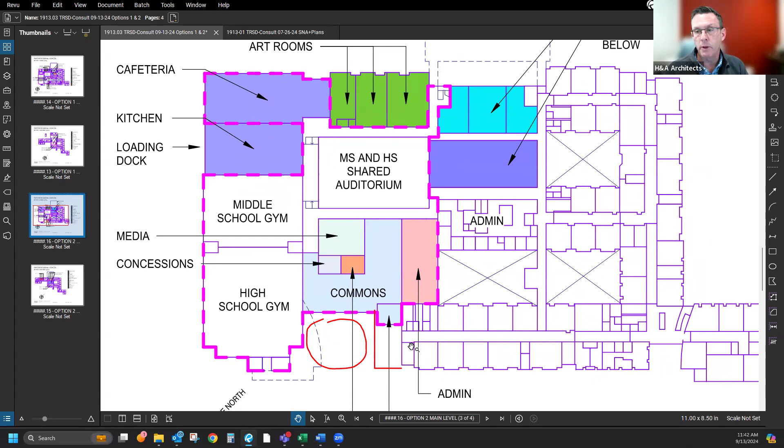I think we would need to find a home for whatever it is that we're displacing, assuming it's something we want to keep in the program. In this option, we would go downstairs and use the space on the lower level for wrestling.

Will we still have the wrestling room though? Because that's one of the big reasons why we're so successful at wrestling.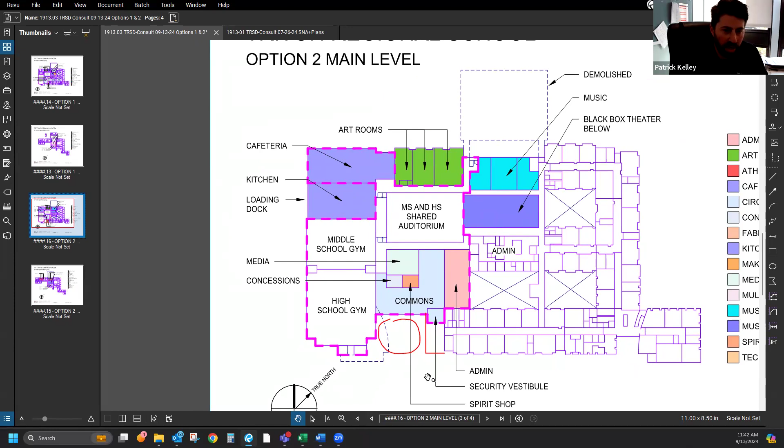You'll have to remind me where the wrestling room is. Is it here? Yeah, it's under the loading dock. And the space captured downstairs, that's also our 18 to 22 program - some of those spaces recaptured for athletics downstairs are our shop in the 18 to 22 program, our shop spaces, here where athletics is reclaiming.

So that shop would be moving into the middle space in the building, using those spaces differently.

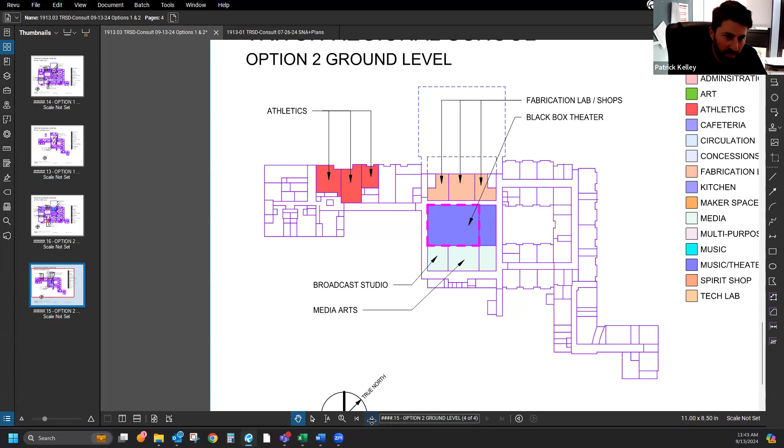Well, tell me more about wrestling. Our wrestling program has been really successful for a long time - it's probably one of, if not our strongest sport.

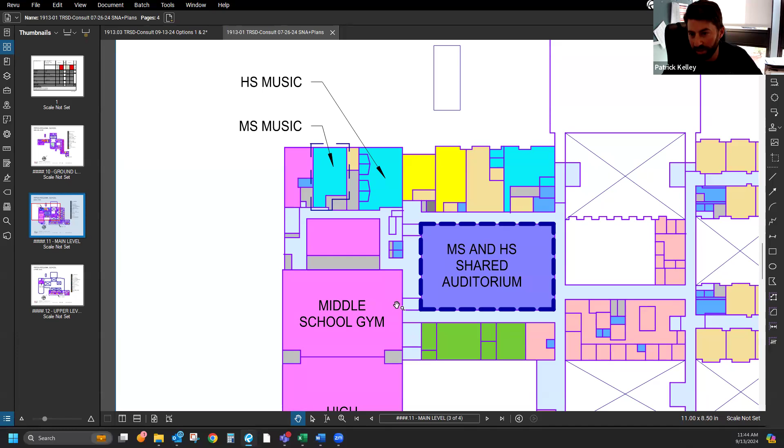They've got a wrestling room there on the backside. I've got issues with the wrestling room in terms of - and our weight room would be taken out of that version as well, so we'd have to figure out where that's going. I think that would go downstairs, but one of my issues with the wrestling room currently is that it's got poor ventilation and the ceiling height is too low. Moving it downstairs would probably provide better ventilation and light, because right now it's kind of a square box with no airflow.

I totally agree with you. I just was - I mean, all these plans, I know Triton's moving to a lot of arts, but it seems like we're really extremely displacing all our athletic programs on all the plans. I have concerns with that.

Is this the wrestling room right here? Yeah, that's the wrestling room and weight room, with storage in between.

I'm not sure it's a problem if the wrestling room moves downstairs, basically next to where their locker room is, right? So the locker room that the wrestling team uses is right on the corner - to your right, so it's right on the corner there.

Across from one of those red spaces, it's actually easier for practice sense if you're there.

With all this media and everything changing, what is going to go on with the detached building we have now? Could we take that and make it all into athletics, since most of the media and arts are going into the main building?

It's really just the TV production class that's coming in. So out there now, we also have a social studies class, and ideally I'd want to move that back inside, although the teacher out there is doing some really amazing work with indoor-outdoor spaces, and there's also the teacher running our IB program.

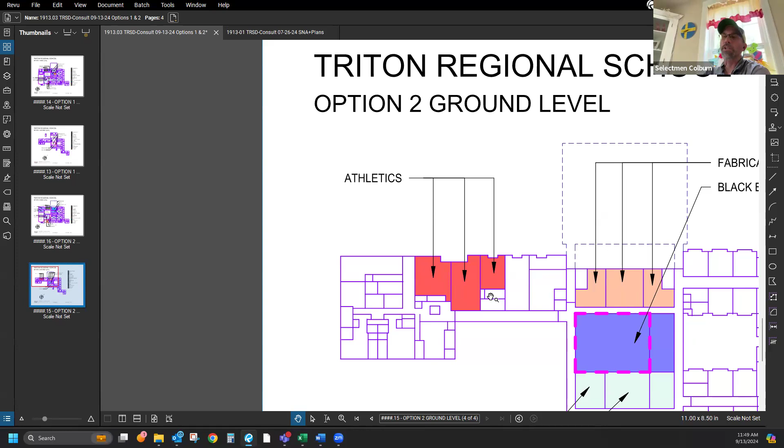Absolutely. One of the other ideas too is if we were able to open up some of these walls - I can imagine a glass roll up, garage type door, where it's warm enough. You can open up one of those doors and all of that ventilation issue, really help to vent it out and provide extra air. But we could develop a little area to extend the program to the outdoor space when the weather would allow it.

I mean, we've worked on some athletic facilities where we've done that concept with the roll up doors. It looks almost like a shop, but it's for athletics, and it's been very popular. Kevin, we actually at one point did have garage doors there when there was auto mechanic stuff going on. So there's already a structure and a framework for that. Yep, I was actually going to say that, Patrick. That was Mr. Spicer's class. Yeah.

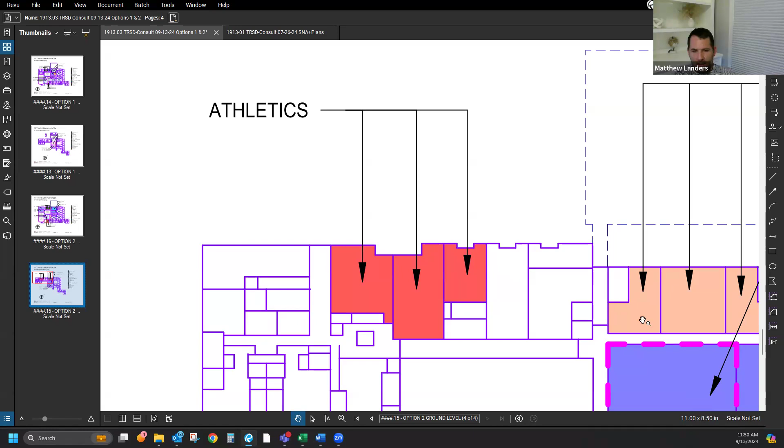So quick question. So for option 2, we have to build roughly a 10,000 square foot addition off of the library. Option 2, yes. That right there, yeah, that's roughly 10,000. This area here would be a 2-story addition, and I'm just trying to guess as to the size of it, but I know 5,100 square feet of floor, roughly.

Did you scale this out? I did it off of Google, so it's probably not 100% accurate, but pretty close. So yeah, we're looking at like 10,000 square feet. That's going to be pretty expensive. I'm trying to see how big the cafeteria was. 8,000.

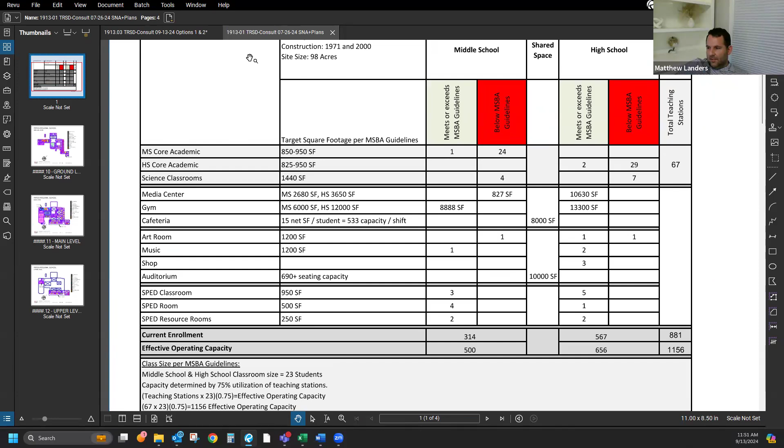So it might be smaller than that. I think the cafeteria is 8,000 square feet, but it looks like the kitchen's another 8,000 as well, because that whole building is 16,000. Yeah, I think the kitchen and the cafeteria are roughly the same size. They're 16,000 total, I'm sorry, I'm flipping around here.

So this area would be 8,000. We were talking about filling in that much, so that might be 6,000, two stories at the floor, right? 6,000, so 12 total, two stories, so 12, maybe 13,000, 14,000, something like that.

And what's the average these days, a thousand per square foot? We talk a lot about $1,000 a square foot, and for a small addition like that, I think you definitely would be at the high end of that range. So roughly 14 million. Yes. It's hard to imagine, but that's where we're at.

I don't see it. Yeah, I think again, that's right. And if I'm understanding option 1 and 2, I would rather not have to add that on, even if we were losing the cafeteria, and have those same needs captured in two stories where the black box theater is, right? That workroom and a makerspace on the first floor, and then underneath.

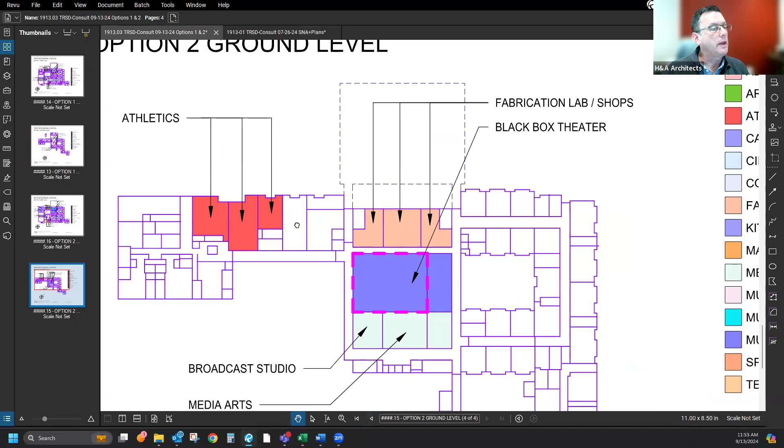So are you suggesting instead of... I think I like the option 1 layout for where the black box theater is. Yeah, I think we need to give up on moving the cafeteria. Okay, too expensive. So option 1 though, but with the black box theater, right? No, option 1 as it is. Maybe make the commons a little smaller.

Yeah, I like the scene shop, makerspace, and then the lower story use of the space better than using the studio and those spaces for capturing all of that for a 2-story black box theater. Got it.

So as a general rule, it's safe to say renovating the cafeteria where it is, square footage wise, kitchen, all the utilities as you mentioned, is no questions asked more cost effective than rebuilding the space from the ground up. Absolutely. And I think that's the route we need to go, unfortunately.

I agree. Yeah, I think we need to take that off the table. Not unfortunate, it's not unfortunate. No, I'd like to be able to redesign how we use the school, but we just don't have that budget. So we have to go as economic as possible.

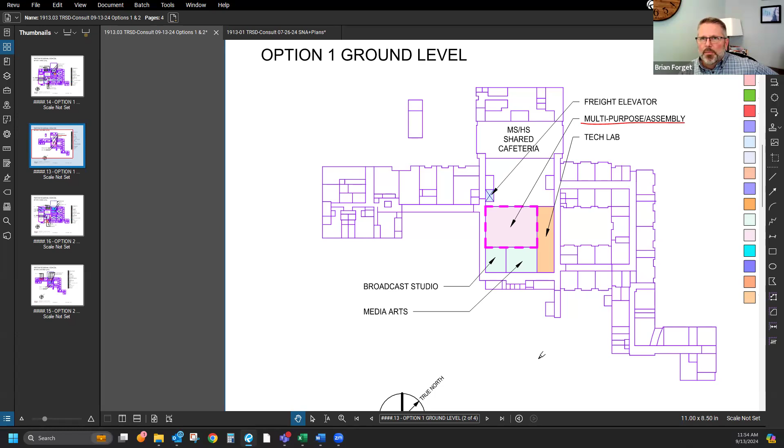Yep, and then the one other thing I would say in a kind of version 2.0 that we'll get to look at again next time is really rethinking that entry courtyard, the commons, to find a way to bring direct access to the high school, to the middle school, and then even the district office, that second half of the admin space, could somehow be directly accessible.

So you come through security and you're into that commons. And then, like, while we're unloading buses, they're all coming in together, and middle schoolers are peeling off to the middle school and high schoolers to the high school, whether that's inside or outside. But I think that single point of access and entry for security, and then being able from that commons to get into the district office, the high school, and the middle school.

And I love the idea, we've always said, well, let's just put the central office out in the outbuilding. I love the idea of keeping us in the building, but directly accessible, and utilizing the outbuilding for more programming space, whether that be athletics, given the fact that it's in the middle of the fields and stadium, or Outward Bound, or whatever it is. That makes a lot of sense.

So I guess my direction would be to continue with option one, maybe look at scaling back the commons a little just for cost, and getting all the things that we just discussed.

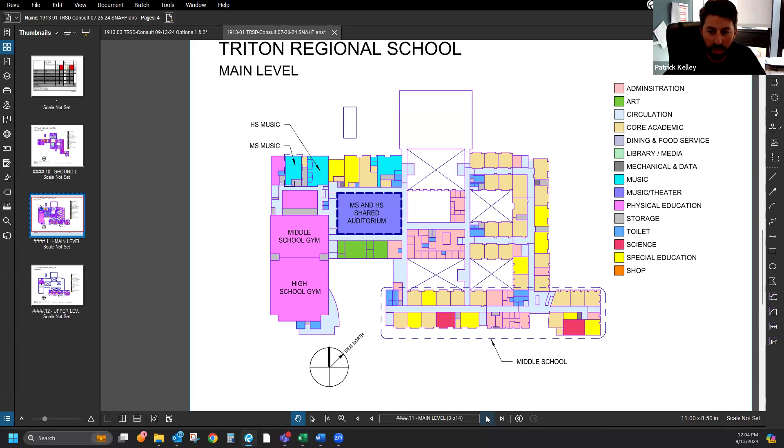Well, if we do the others and don't end up touching the classroom spaces enough, the building is not gonna function how it needs to function going forward or be successful, and we're gonna end up in the same conundrum that we are in now, which is that we renovated half the building and the renovation didn't give us what was needed and leaves us with parts of the building that don't work right. You're absolutely right, I couldn't agree more.

And we haven't mentioned it today because we talked about it at length before, but there's the basic infrastructure needs of the facility that have costs associated with that too. Roof, storage - the one other thing I'm thinking, sorry to keep us dragging on, but if we're reconfiguring where the middle school office goes and the whole entryway, it also leaves us with that giant foyer that is the middle school foyer. That's a lot of square footage.

And whether that turns into classrooms, whether that turns into some type of multi-purpose space, whether you have something on the first floor and something else on the second floor, there's a tremendous amount of square footage there that we could find some interesting usage for. That would probably be great for whether that stays all middle school programming, whether that's shared programming, like thinking about library spaces - that could be a really good space for some of that.

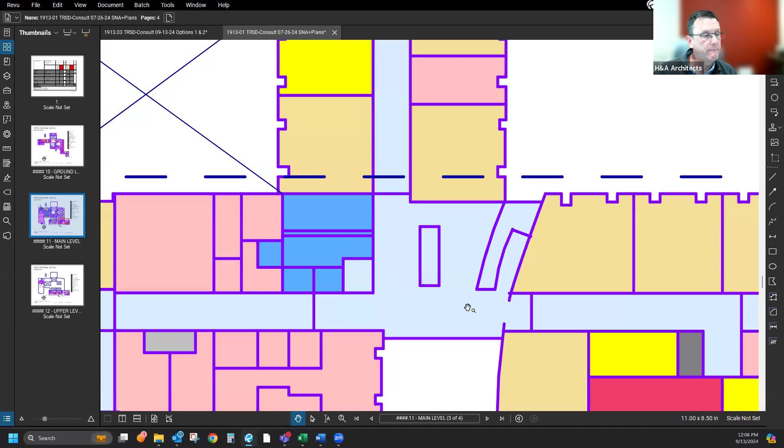Sure, absolutely, we're talking about a lot of square footage right here, Patrick. Yeah, because it's both there and on the second floor above it. So you've got two spaces like that, and on the first floor that runs right up against our English classes. So if that ends up being library space, I know our English department would probably be thrilled because it's right next door.

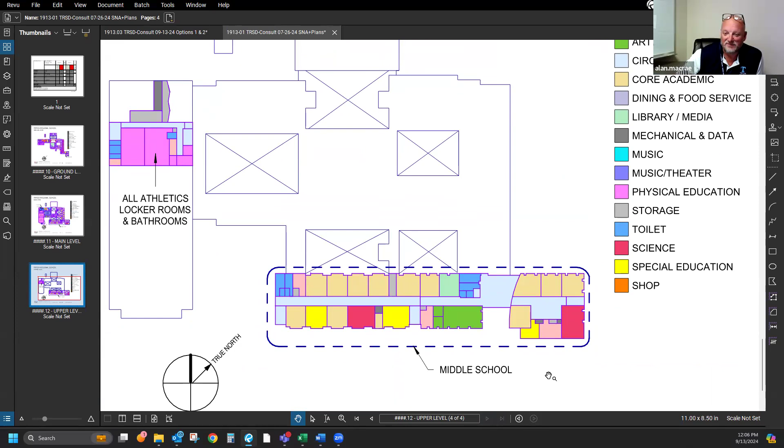If we're creating a shared library space, I think that could be really cool. Al, he's already stealing your space. I was gonna say, I don't have much left to give. You already have a lot.

So I would love Patrick and Al's thoughts on - like we were talking about bringing all of the administrative space down to the, I want to call it a courtyard, the commons, right? Is that workable? Does that make sense to both of you to relocate those spaces and have one central kind of administrative area?

That makes perfect sense, I think, especially if that's going to be the one area of access to the building. Yeah, people come in, they can go middle school office, high school office, central office, depending on where they need to go - it's all one spot. I think that makes a lot of sense.

And then it gives you a lot more space, even off the foyer, because now you have the middle school administrative offices - what are we gonna do with that? So you could trade two of the middle school classes down right off of the commons and put them where the office is now and get middle school office space.

And then I was thinking even where the current entry is to the middle school, Kevin, that's like a big step up - it's the first steps you see as you're driving on campus. That could be kind of, it's elevated, keep it elevated, rail it off, and there could be an outdoor space. Could be an outdoor learning area for the middle school. It could be an outdoor seating area for, you name it.

Could be an outdoor eating area for staff. Like, it could - we could create a staff wellness area out there. There's a lot to do.

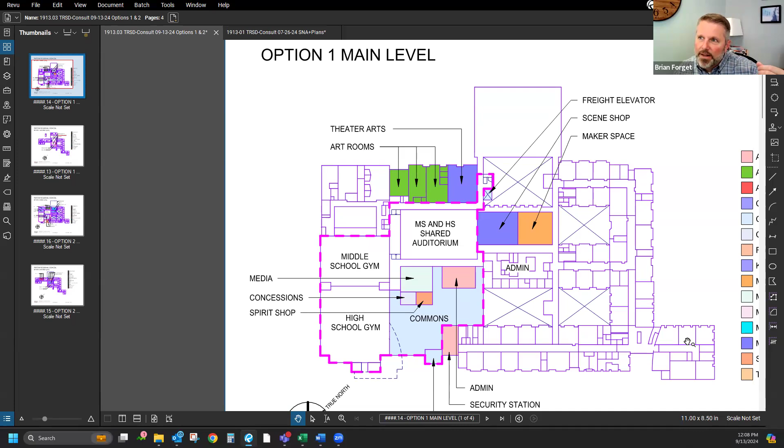All right, so it's already 12. Does it make sense then, Kevin - you said fairly short turnaround, 2 weeks, 1 week?

I think within 2 weeks, I'll try to do better than that. I think we can get you another iteration of this. Then, do we want to try to schedule a follow-up meeting now?

I was going to say, I'd love to get something on the books. When we had originally put dates on the calendar, we had blocked out a date of October 11th. Again, there's been some changes, so I don't want to assume that's all perfect, but it's 4 weeks from today. Is that right? Did I lie?

Yeah, so that was a date we had talked about. We could keep that - that gives us time to send information. This is an open meeting of a public body for the school committee, so we obviously can't discuss it, but when Kevin gets those version 2.0 materials to me, I can send that out to this whole group. That gives people a couple of weeks to let that bake and think through what we like, what we don't like, what's it missing.

Does that make sense - get that in a couple of weeks, give people a couple more weeks to think, and then meet on the 11th of October? Did I say that right? Yeah, meet on the 11th of October.